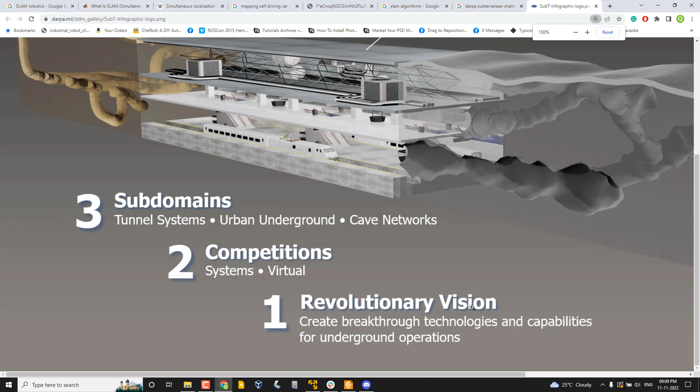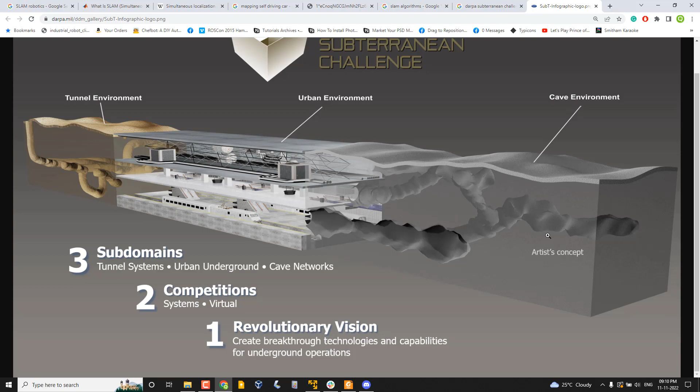So this is a challenging environment in the competition. There is a tunnel, an urban environment, and a cave. It's actually an artist's concept, but it's a cave. The competition is basically mapping all these things.

But you can think about the complexity. Inside the cave, we can't control the robot. You won't get Wi-Fi, and even assistance is very difficult.

Like even humans can't go through these caves. It's very difficult. That's why they organize this challenge, because one of the important things robots solve is tasks that humans can't do, or are afraid of doing. If a human wants to go into some complex cave, there's a risk involved, but for a robot, even if it dies, only the money matters. If a human travels through the cave, life actually matters. So that's why we are deploying robots.

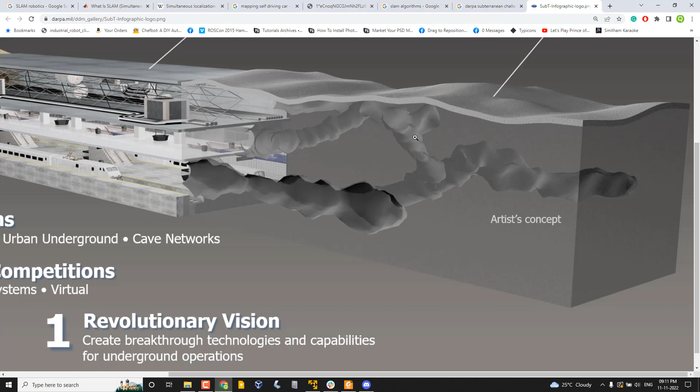So in order to map these complex environments, we are using SLAM algorithm and also some exploration based algorithm. Exploration, from the word itself, means simply exploring unknown areas. Humans are very interested in exploring unknown places. Likewise, a robot has an exploratory algorithm, so it can keep exploring unknown areas and keep mapping it using SLAM.

So I think you got the relevance of the SLAM topic. It's used extensively in robotics, and there's a lot of research happening in SLAM. I've seen a lot of SLAM based projects while doing research assistance at CMU. They were working on drones, using drones and lidars. That's the main area they've been working on. So drones go through caves or some area and map the 3D environment.

So that is the relevance of SLAM, mainly used for mapping the environment, and at the same time it can localize the position on the map. For example, the robot is moving in an unknown area, and while moving, it's creating a map. At the same time, it's localizing, meaning it has an estimate of where the robot's position is with respect to the map. That is what SLAM algorithms are about.

There's a list of SLAM algorithms: 2D SLAM, 3D SLAM, or visual SLAM. 3D SLAM works on the point cloud. I think I've shown you the 3D point cloud around self-driving cars - that's kind of 3D SLAM. So I think you got an abstract idea of what SLAM is about. That's the SLAM concept, and if you simply search it, you can find good examples and definitions.

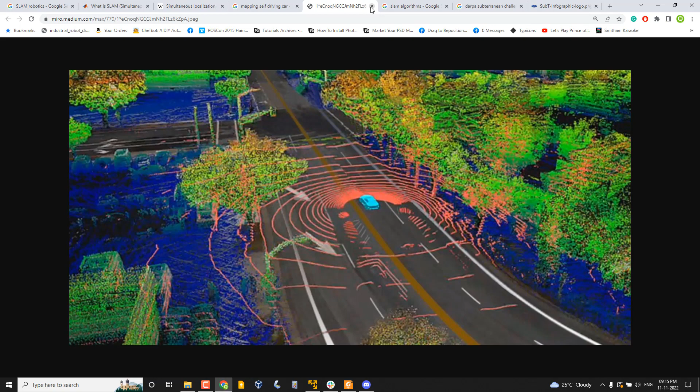That is depending on the type of SLAM that we are using, and that's what we are covering next. So what are the different types of SLAM? We are going to cover that.

So maybe I can simply mention, for performing the SLAM algorithm, we need a set of inputs for sure. There are different sensors available - we have to use the odometry data, that is wheel encoder feedback, then lidar. If it is a 3D SLAM, we have to use 3D depth sensors or Velodyne kind of 3D lidars. So it's a combination of these kind of sensors based on the type of SLAM.

So I can talk about the input and output, maybe while discussing the different SLAM algorithms.

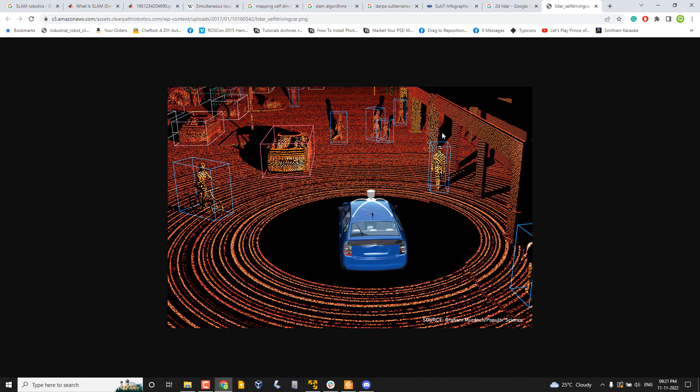And rather than these sensors, there is visual SLAM, which is mainly using camera input. And there is visual SLAM with camera and laser scan - it's a combination, and you can create a SLAM algorithm based on multiple sensors. For example, if you have multiple LiDARs, you can input them to the SLAM.

So there is a question - what is pose graph? Visual SLAM uses RGBD data. Yeah, I am coming back to that point, Tejas. So these are the set of sensors - for visual SLAM we are using cameras. There are cameras like normal cameras we can use, or stereo cam, or depth camera.

I think you have seen RealSense, right? RealSense can output RGBD data - RGB is the colored image with depth information. So these kinds of sensors we can use as input to SLAM, and also we can use IMU as input. Based on the type of SLAM, you can use a combination of sensors. The majority of sensors we are using are encoders, camera, lidars, IMU - these are the main sensors used in robots.

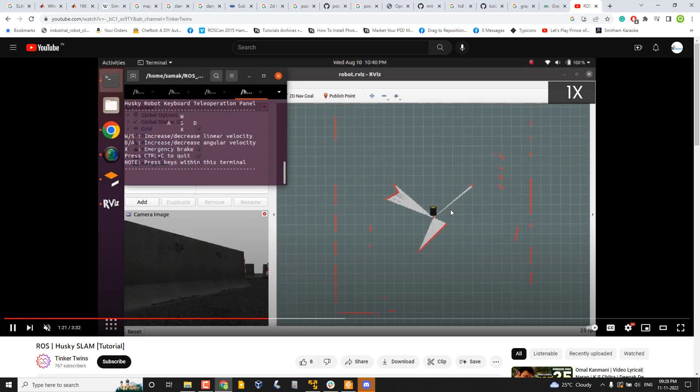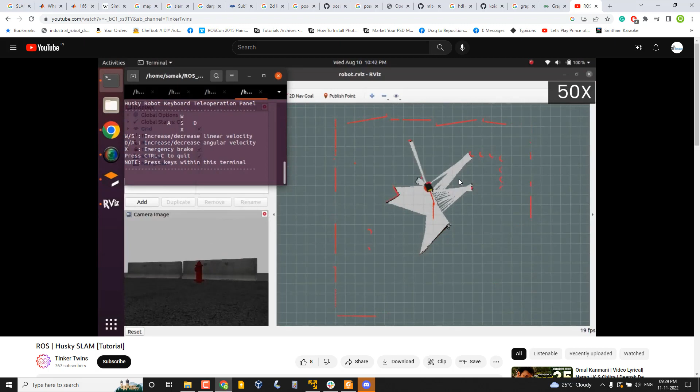So you can see when the robot moves, it actually builds the map. When the robot moves, the odometry changes, the laser scan data gets updated, and from that the front end calculates the motion. You can see whenever the robot moves, it builds the map and also the robot pose - the robot pose is with respect to the created map.

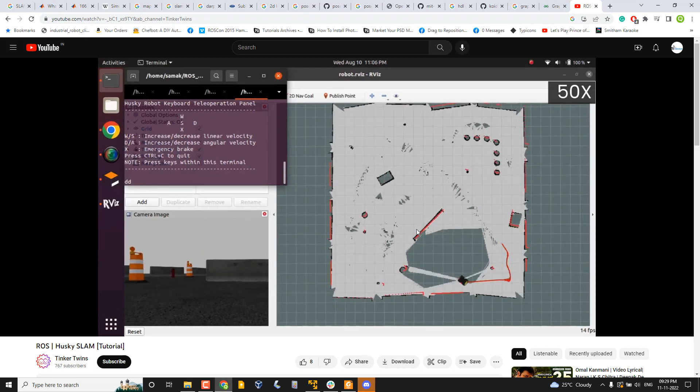So in order to hold this kind of data, we are using one of the approaches: the graph data structure. There is a famous library in C++ that is used by modern SLAM algorithms. I actually attended a talk by the author, because there is a famous company called Skydio - I will get back to that after this. So in order to hold the changes in the map, we are mainly using the graph data structure.

Graph data structure, and that is actually converted into the map, like the map that you have seen here. So there is a lot of processing happening - taking the sensor data, then motion estimation, registering on the graph. This can't be the same for all graph SLAM algorithms - it's mainly for SLAM algorithms that use the graph as the main data structure, I think.

So I mentioned pose graph because there is a company called Skydio. I'm not sure you've heard about it - anyone heard about Skydio, guys?

Skydio. This is an interesting company, a drone company. These guys actually started autonomous drones for filmography, and it's awesome actually.

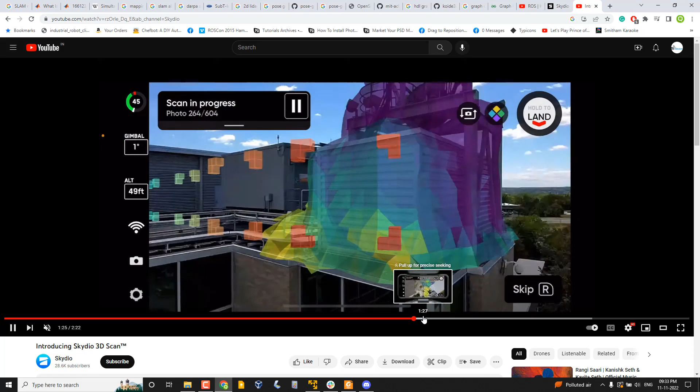You've seen the action shots in some movies, right? Skydio can perform better than that. So that is Skydio, and I can show you the film.

That is also interesting. This one was actually released 4 years ago. This was the first product of this company, the first model, called Skydio R1, and I actually worked with this drone. It's actually good.

Just start the drone, start the app on your mobile, and then you can just move or run, and the drone will be tracking you. It's not only tracking you, it's actually filming you, and you can see how complex it is.

I'm appreciating this technology because these guys are from MIT. They worked many years to mature this technology, not just to make it, but to mature it. You can imagine how complex it is.

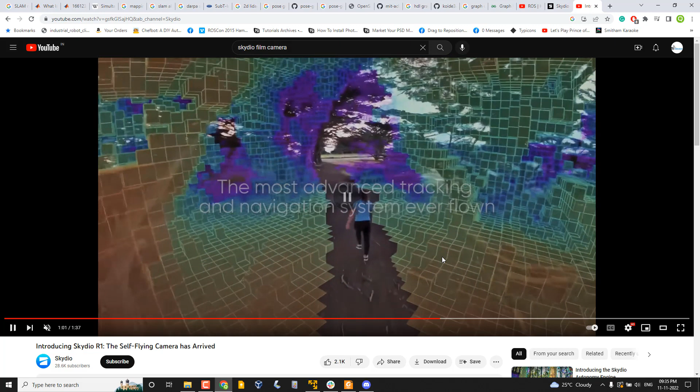You can see here the Skydio drone is actually creating a map of the surrounding in real time. Using that map, which is basically a voxel grid map, it can create a plan through this map and avoid obstacles.

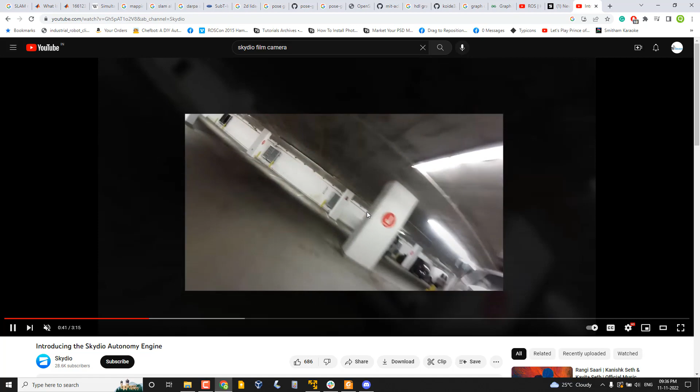Here is another video with the founder of Skydio. This was the first project, an autonomous helicopter that they created at MIT, and it can go at a very fast pace. This is happening in a parking space, and it's moving very fast.

And here is Skydio, the product, and it can perform much better than that. You can see some visualization, that's what I was trying to show you.

There are cameras around it, and the drone is perfectly working using cameras. There are no lidars, all using I think 12 cameras basically, and all cameras are fisheye cameras. Fisheye means there will be distortion, so with that distortion itself, it's able to create the 3D point cloud.

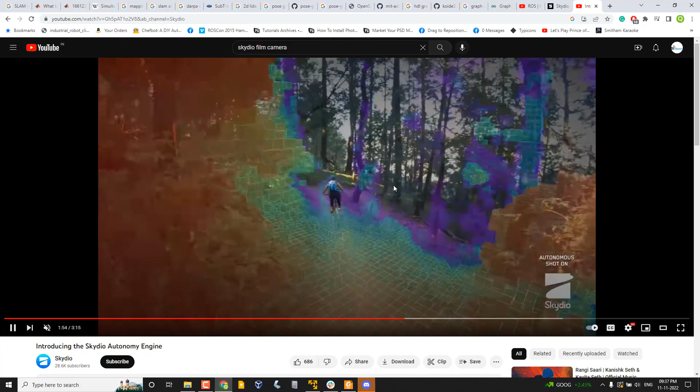Within this very challenging environment, they are creating the 3D voxel map and trying to create a path. The planner is the next challenging part, and it can track people and film them. This is the internal representation, the robot is actually navigating with this complex point cloud and creating the trajectory in real time. I was just saying about the importance of SLAM and the algorithm and the latest stuff happening.